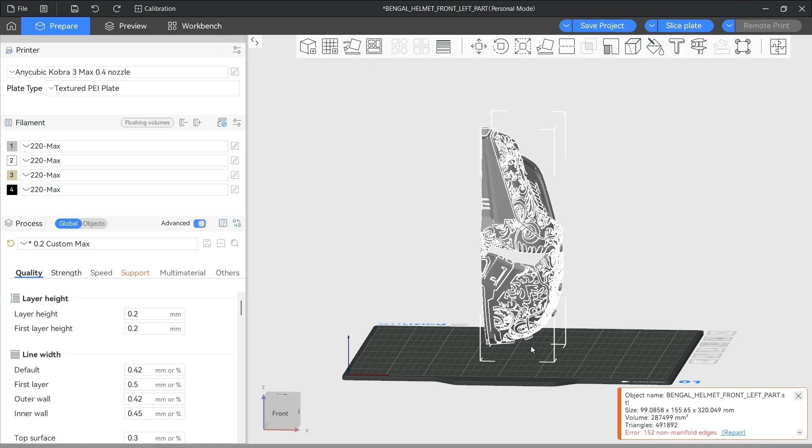Choose the first part of your model that you want to merge, put it in your slicer and right-click it, then choose Add Part, Load, and choose the other piece that you want to merge to. Then move that piece around wherever you want it to stay.

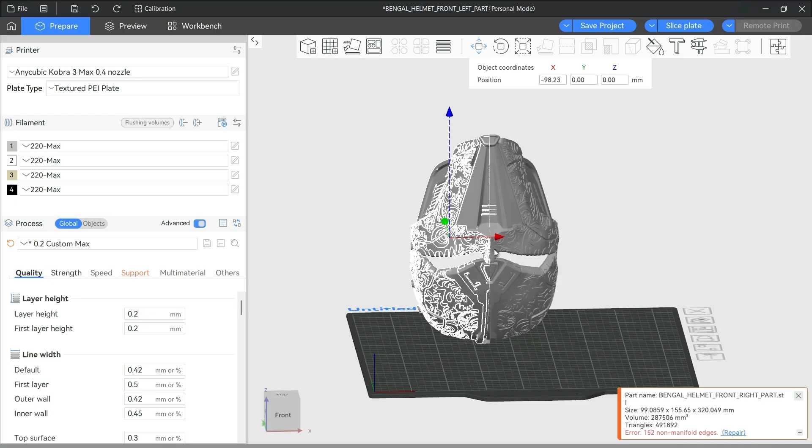This is a mask, so I'm going to be very careful about making sure there is no gap, making sure everything lines up correctly. You can manipulate each part of this project. Now it's a project because there's more than one piece.

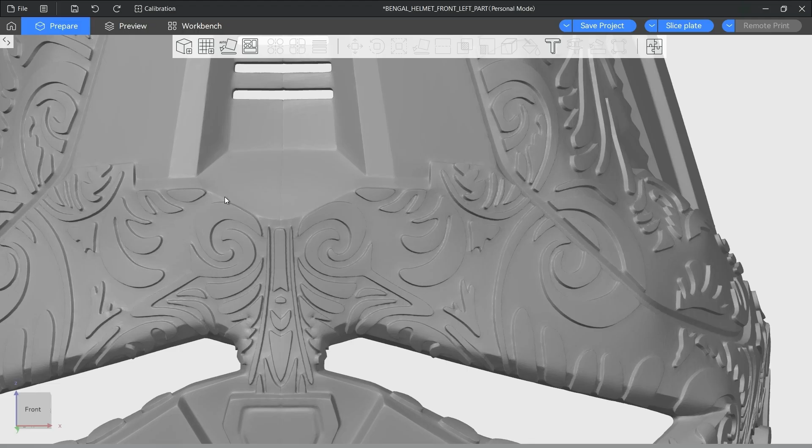Once you feel like you've got it lined up and there's no gap, you can slice the model and check it and make adjustments. If you want to adjust just one part of the project, you go into the objects list in the left panel right here.

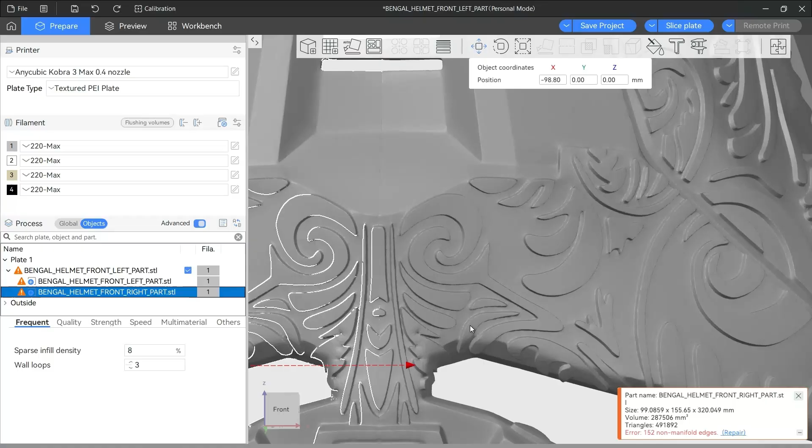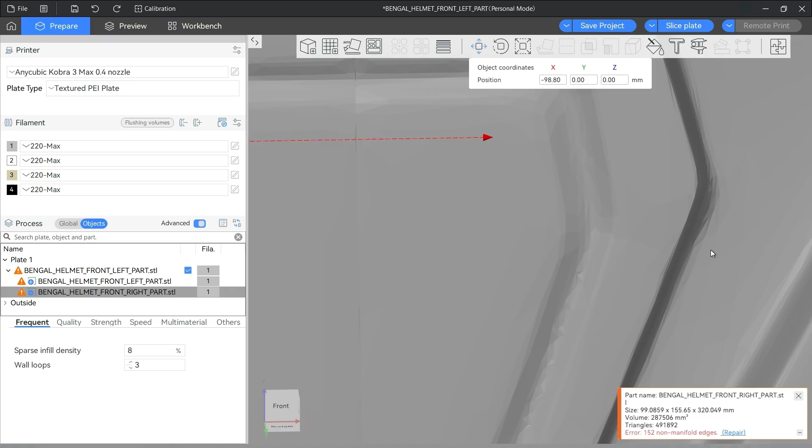Click on the part that you want to manipulate, and once it's highlighted, you can do whatever you want. Move it, rotate it, scale it, and it won't affect the other objects in your project. If you want all of your objects to be manipulated or scaled together, then just click the object and do it. That way it's not just one piece being manipulated, it's the whole thing.

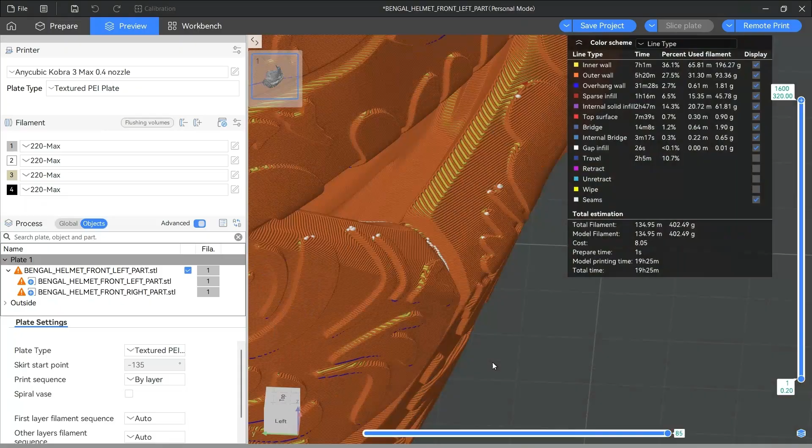So now that I think I've got this all lined up, I'm going to slice it and just check in the slice view if there's any gaps or weird geometry in the path of the nozzle. Everything looks perfect. I'm actually shocked at how easy this one was.

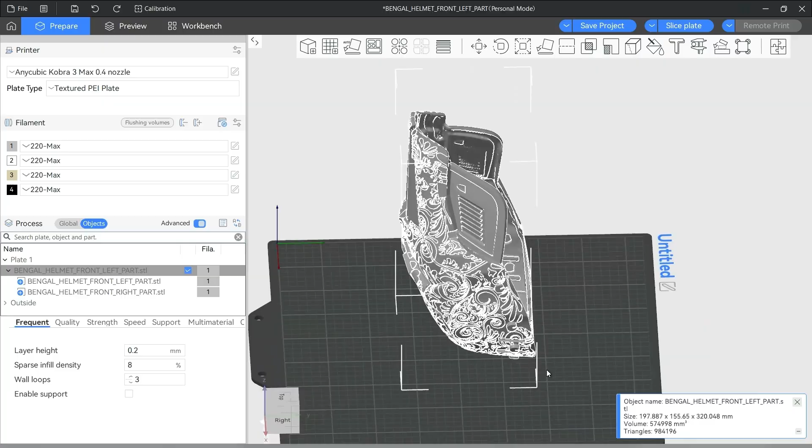I'm going to get this ready to reload into the slicer for the next step. So I'm going to center it, and then repair the model over here by double clicking the triangles. Might take a while. Then I'm going to rotate it and make sure it's upright, kind of the direction I want for the next step, which will be scaling so that you can fit this to your head.

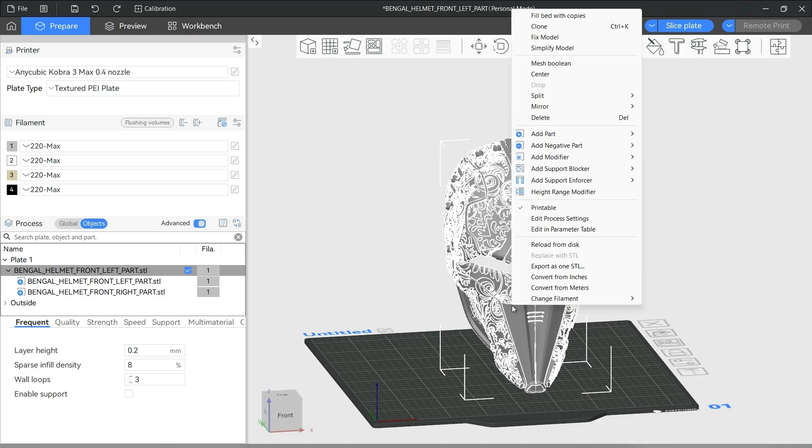So let's give it a flip, and then we're going to right click and choose Export as one STL. This will make a fully merged mask into an STL, and if you don't think that's helpful, wait until you want to resin print something and merge it first.

Now here's a cheat code. Go into MakerWorld and find this head model, measure your head, and pick out the right head size to download.

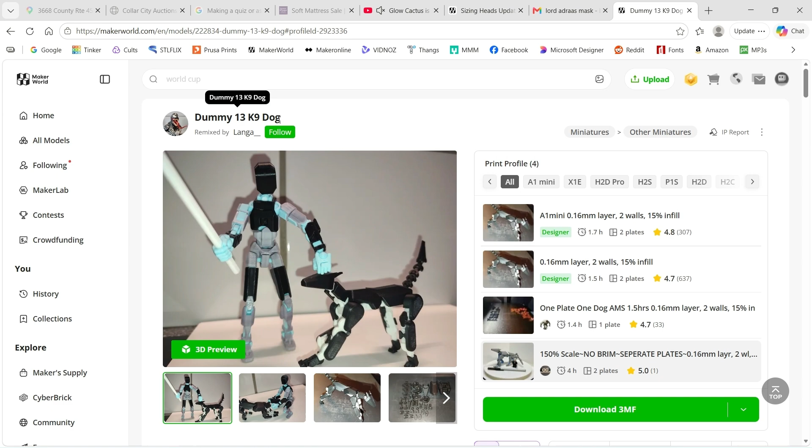Then once you've downloaded your correct sized head, find this other model, the Dummy 13 K9 Dog. I just happened to stumble upon this months ago, and this particular file, the 150% scale, has a transparent filament profile in it. So here's why this is going to be helpful.

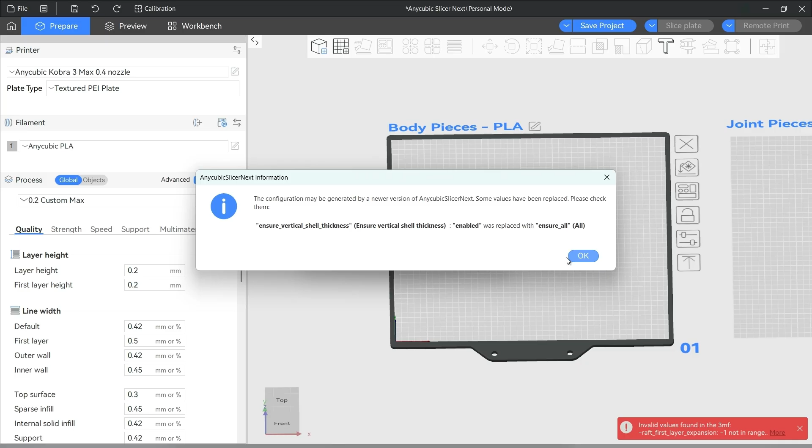Go ahead and open the K9 profile and take a look at this transparent filament profile. Isn't that so cool? This is going to help us when scaling our mask.

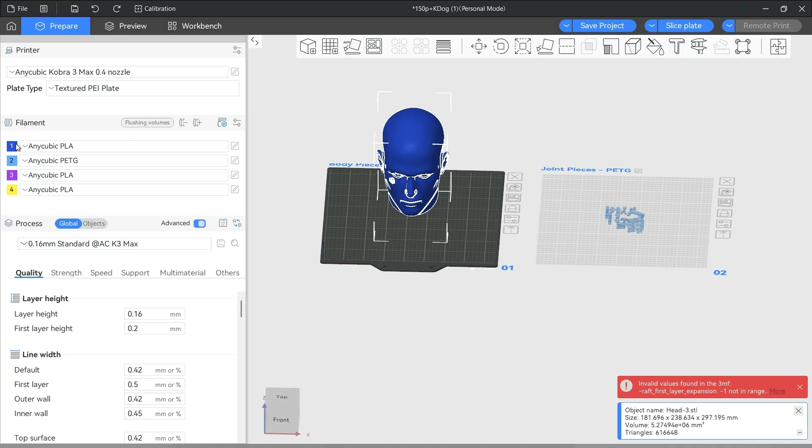So delete everything on the plate. That's fine, you can also delete the other plate too if you want. Then bring in your head, and make it a nice neutralish color, something easy on the eyes like gray.

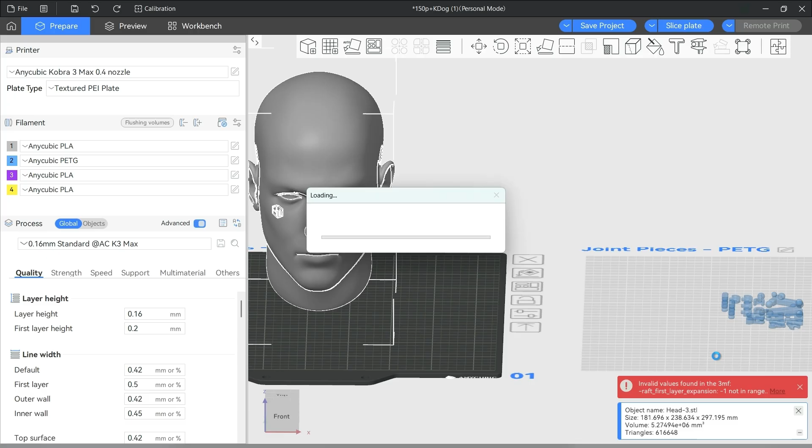And then right click on the head and add part, and then load your mask. Once you get your mask loaded, you're going to recolor it the transparent color, and that way you can see through the mask while you're moving it around on the head.

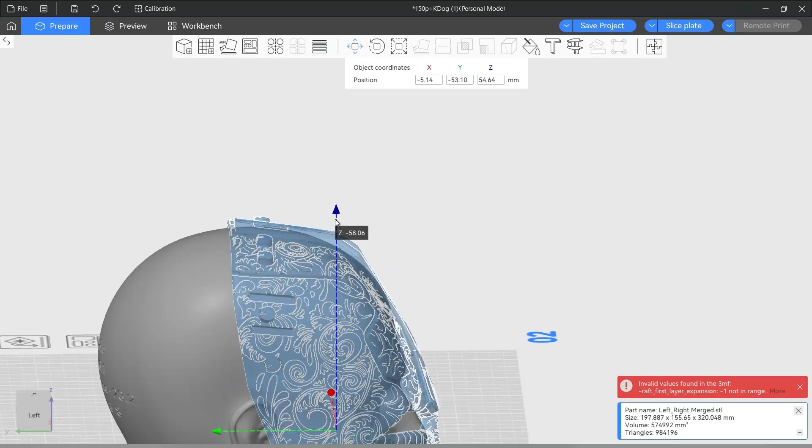You can see where the mask touches the head and all the important things of scaling a mask. Same thing for helmets, you can use this for helmets too.

This part has got to be the most frustrating part, trying to get it placed perfectly on the head.

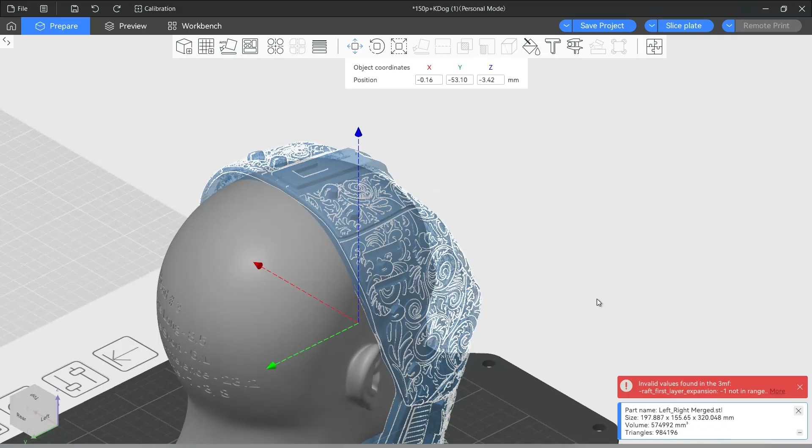And then also take a look at the eye holes to make sure that you can see out of the mask or helmet when it's on. That's when you'll be able to judge whether or not you have to scale it up, scale it down, stretch it, make it thinner, make it wider, make it taller, make it shorter.

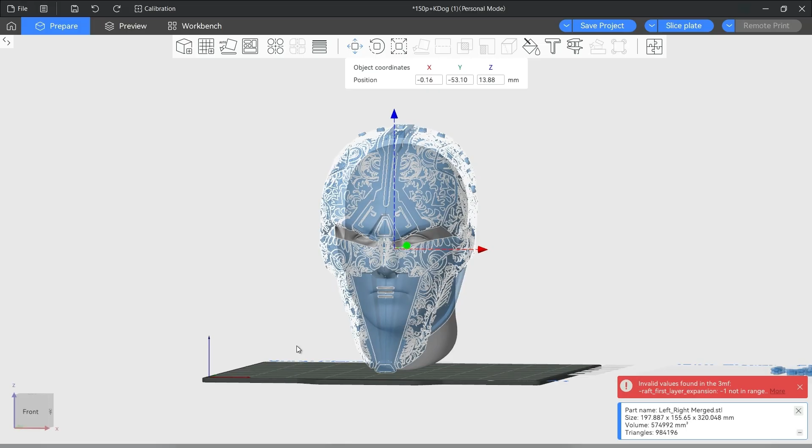You can scale this however you'd like after you get it placed correctly. I like to match it up with the eye holes first and then start messing around with sizing.

As you can see, this highlighted the entire model, including the head. So I'm going to go in the Objects panel, select just the mask, and then I can adjust it.

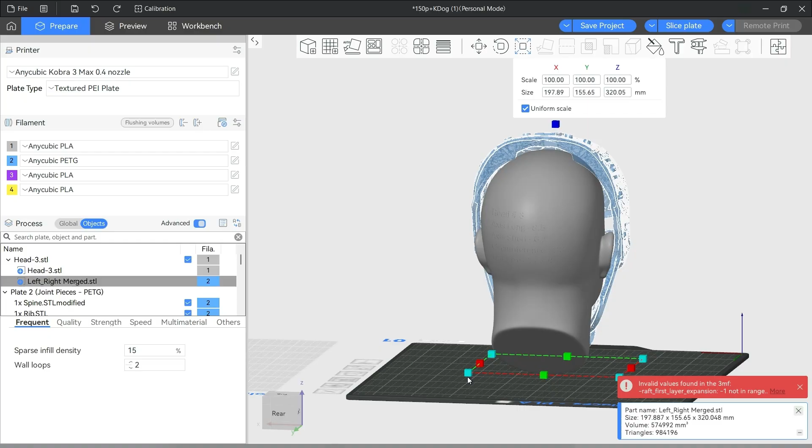If you want to scale the entire mask and not just a specific direction, you just grab the corner here and you can scale it up or scale it down, and that will not distort the mask at all.

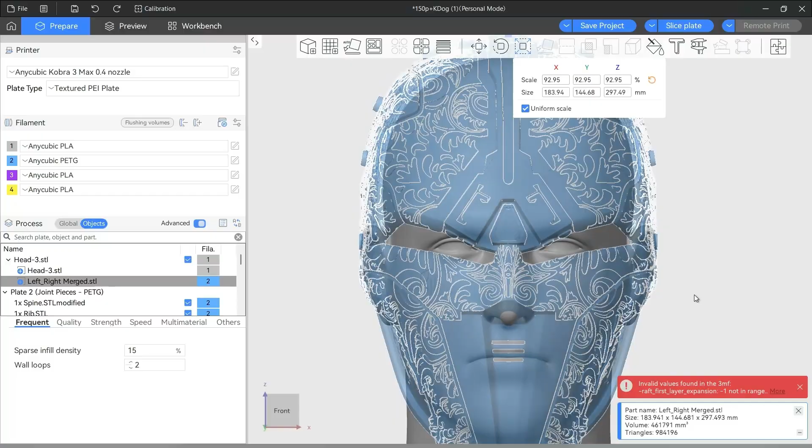So if you have other parts that are going to line up with it, they'll still line up if you're doing a scaled adjustment. But yeah, that's how you scale it.

And then you can delete the head by selecting only the head in the objects list and then selecting delete. And then you can change the color of the mask back to a regular PLA.

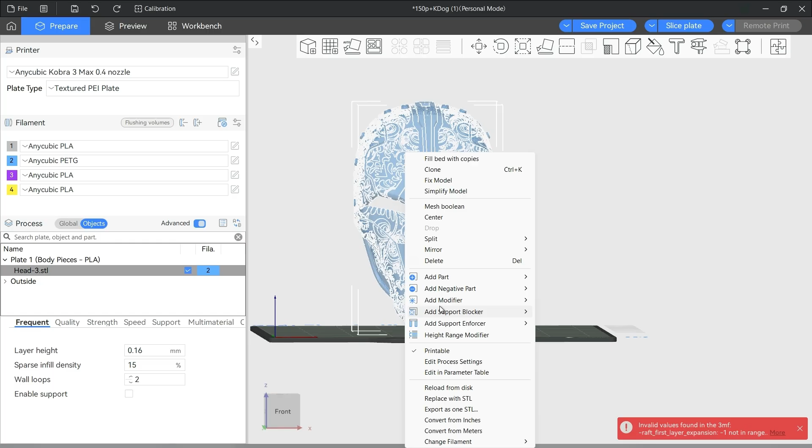Right click and export as STL. This will export your scaled or adjusted mask or helmet. I'm going to overwrite the 100% scale.

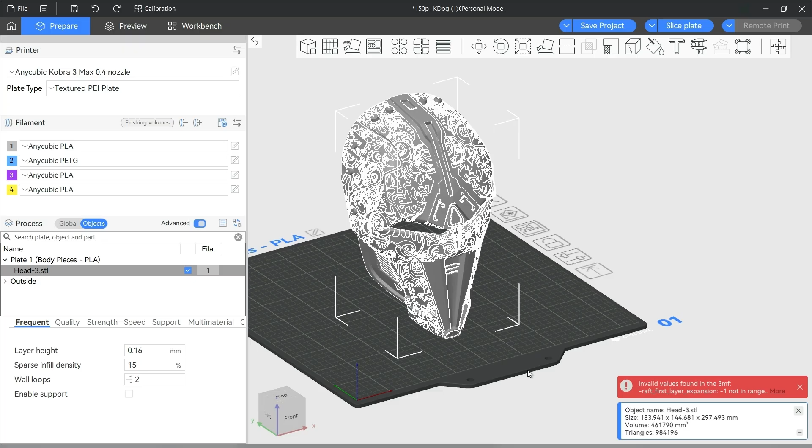And now I have a mask STL that matches my exact face, so it'll fit after I print it. I won't have to worry about making major adjustments to it.

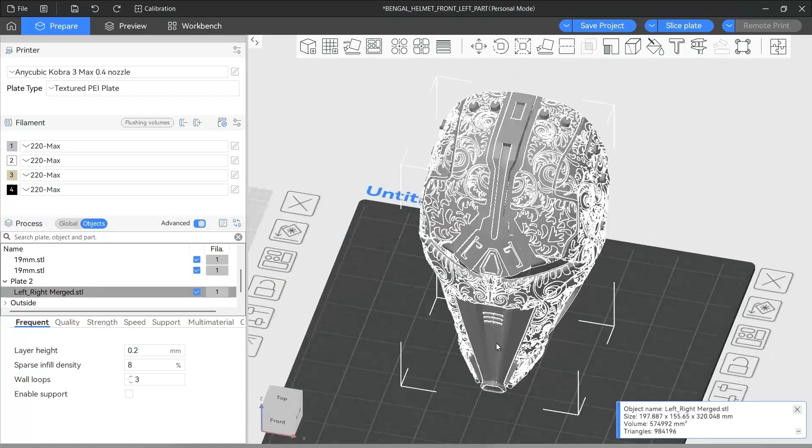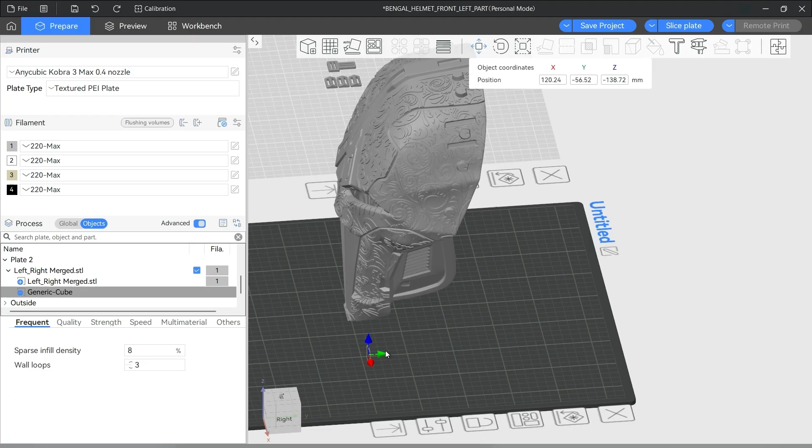Then I added some straps, clips in here so that you can add some strapping to this mask to hold it onto your head. Then what we need to do is add negative spaces for those straps to pass through. So right click the mask and choose add negative part and cube, and then you can adjust the size of that negative cube to match your straps, however thick or wide your straps are.

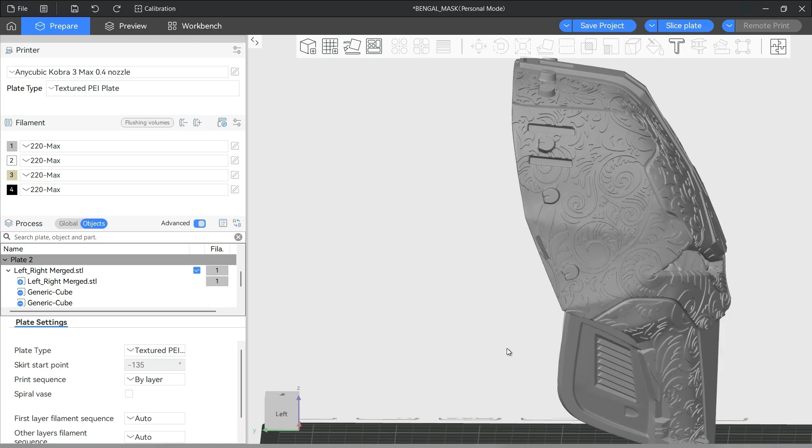Then go ahead and put these on. Originally, I placed them up a little too high, like above the temple, and I realized it a little later on and moved them down. And then I'm going to angle it so that it kind of just matches the mask and I don't have my straps twisting.

Then I want to go ahead and place it where it needs to be and duplicate that negative cube by clicking it in the objects list and then hitting Control V. You saw there I just deleted one, you can just click and then hit delete on your keyboard.

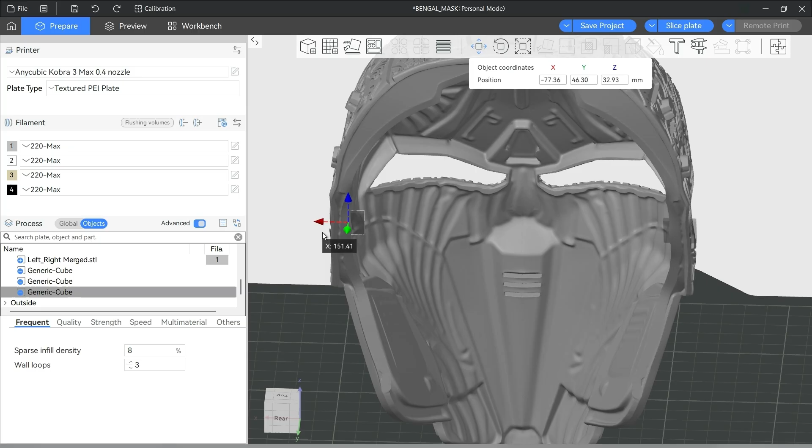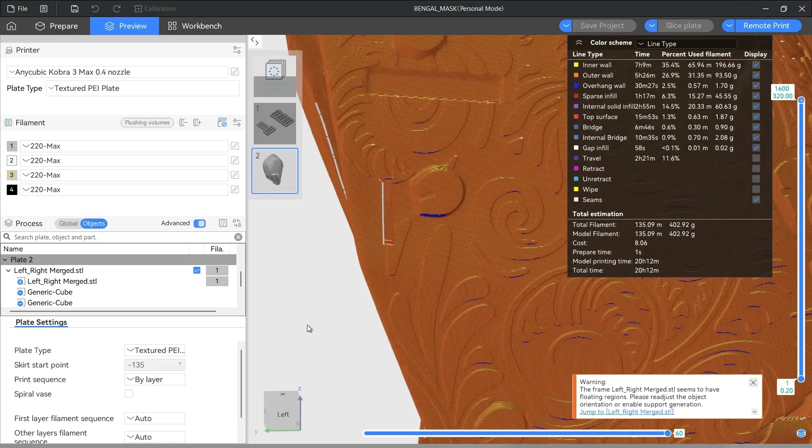And then you click one and do Control C, Control V on your keyboard, and then move it using the red arrow left or right, and that will make sure they're both the same height. It's important that both of your strap holes be at the same height, that way your mask doesn't hang crooked on your face. Make sure you put a hole at the top so that you can have a triple strapped harness, and enjoy.